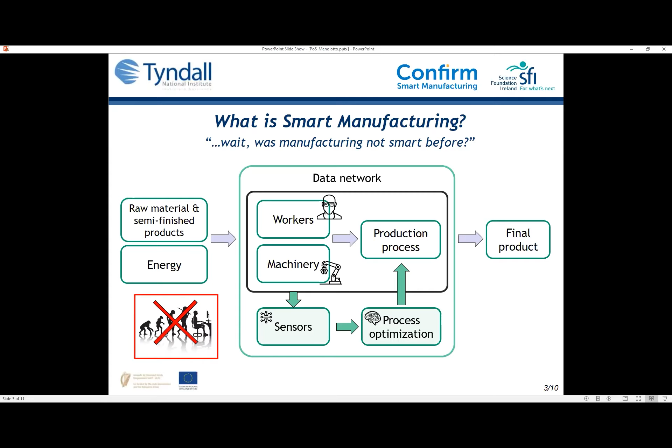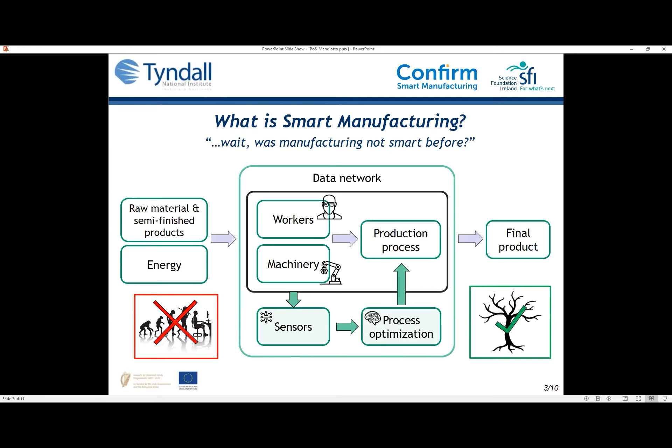And I think it's important to highlight that despite technological advancement generally being quite fast, this process has not started at a specific time. In fact, the industrial world is constantly and slowly incorporating any mature technology being developed, which is why I don't like the term Industry 4.0. It's catchy, and it conveys very effectively the meaning of technology going a step forward. But this advancement is not a linear process. It's rather the result of many different lines of research; some of them succeed, some of them just drop.

Similarly to human evolution, we have all seen this famous image in many versions where a monkey slowly starts to walk and at the end becomes a human. But in reality, what anthropologists know since a while now is that this vision is a very rough simplification and ultimately wrong. Evolution is more like a tree with many branches that coexist at the same time. Some of them fall down, others go on. And technology is very much similar to evolution, I would say. So after this little philosophical tangent, let's go back to the topic.

The real game changer, I would say, in this revolution are data. We can now easily measure a lot of physical phenomena, and with those data we can build models that we can use to predict a specific behavior or to control a specific effect according to our goals. Let's make a few examples.

If you want to keep the room temperature at a specific value, let's say in the summertime, maybe not here in Ireland, but in our classic summertime, we can measure the temperature with a thermometer, and we can easily implement a system that when the temperature goes above a certain value, switches on the fan. This is a very simple system where the information about the temperature is used almost directly to control the parameter that the sensor is measuring.

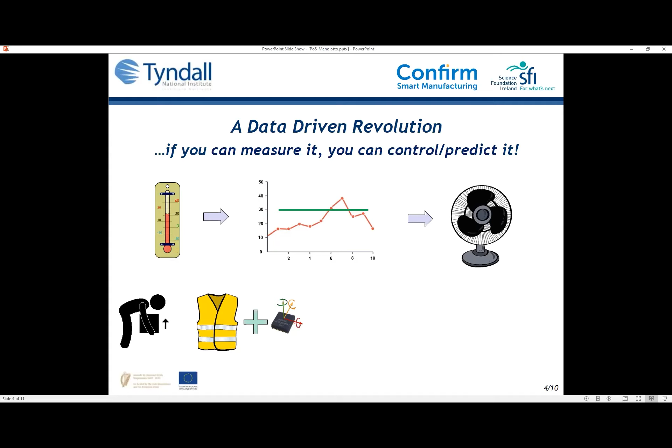Another example could be measuring the posture of someone lifting a box, for instance. Now, there are two ways to lift a box. I don't know if you know that, but I can answer this question. There is a wrong way and a right way.

Or, to explain better, there is a specific body configuration that minimizes the stress to the musculoskeletal system while lifting. So now we can place, for instance, an inertial sensor on a vest, and inertial sensors can detect the direction of the gravity force. So they are usually used to track the orientation of an object in 3D space. And now we can actually build this vest and make the worker wear this vest.

And there are models already that tell us that if your back tilts over a certain angle, your risk of having injuries increases. So we can measure how vertical the back is during the task, and we can, for instance, launch a warning to the worker if his or her position can cause some harm, preventing him or her from having injuries or muscular pain. And that's it.

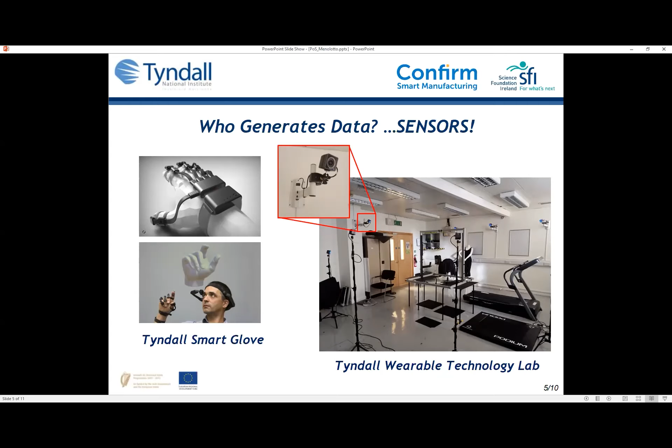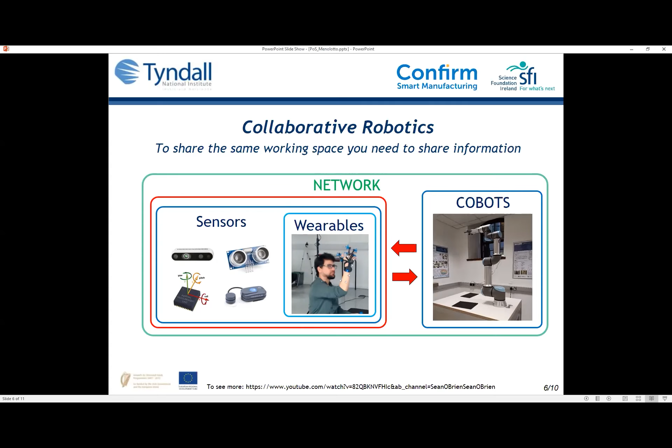So why this last example? Well, this last example finally allows us to jump into the field I'm working on at the moment. In particular, my group is very active in the development of wearable technology, which are devices that, as the word says, can be worn or are in general portable and able to measure some parameters of the person, pretty much like Melusine said about the contact lens for cows. The classic example is the smartwatch, where there are smartwatches that can measure how many steps you are taking, or now also the heart rate and other parameters.

Now, the one you see in this slide is the Tyndall Smart Glove, which is a project I joined and I'm currently working on. It is used to track the orientation of the hand in space via the same inertial sensors we were talking about before. And I also put a picture of one of our labs that we use to develop this technology. There's quite a lot going on in that lab, as you can see, but I wanted to highlight especially the little cameras there. That is actually a very accurate motion capture system that we use to evaluate how accurate our technology is.

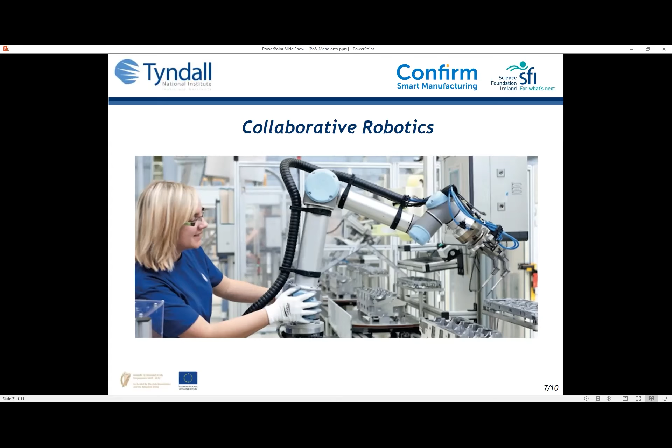So as you can see, the glove could be used for virtual reality applications, given we can recreate a virtual avatar of our hand with the orientation of each part, palm and fingers included, and we can track it in real time. The idea here, though, is to use the glove also as a human-robot interface for teleoperation applications. So to remotely control a robotic arm, for instance, or a gripper, or a robotic system in general for collaborative robotics applications.

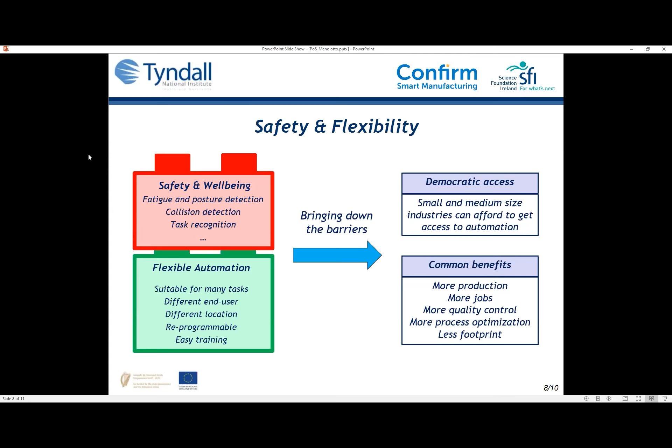Now, collaborative robotics is a very fascinating field that has been enabled by the use of this technology. In a collaborative robotic scenario, operator and robot work together, sharing the same working space. Now, this of course raises a hell of an issue in terms of safety, primarily, which is being addressed by implementing different strategies, the majority of which adopt sensors, once again, to detect the position of the worker and the position of the robot in real time in order to avoid collisions, just to name one.

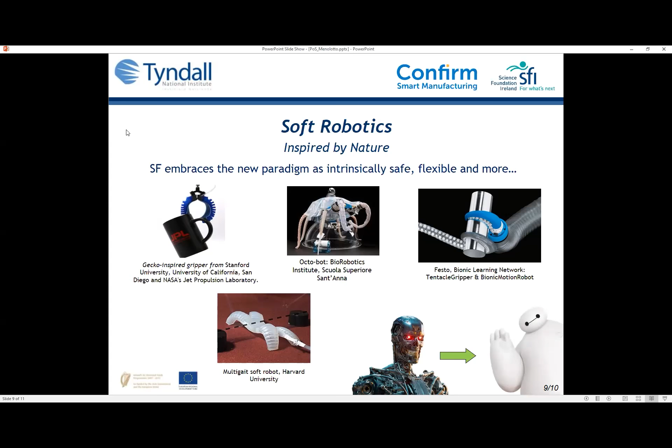But there are also a lot of research topics trying to tackle this problem from different angles, aiming at making robots, for instance, intrinsically safe. And we will see later what I mean by intrinsically. Why is collaborative robotics so attractive? Well, it's not just for its technological flavor. It's mostly because of its flexibility. So the capability to readapt to different tasks, being easily reprogrammable and relocated in any part of the industrial compound where it's most needed, without impacting the existing infrastructure.

And as you can imagine, this means that automation becomes much more accessible and affordable to medium and small scale industries as well, which can get all the benefits of automation, expanding their production and their employability as well. Still, one of the great challenges to fully enable this scenario is safety, which should be implemented at different levels, if not even in the design process itself. So in that sense, I said intrinsic.

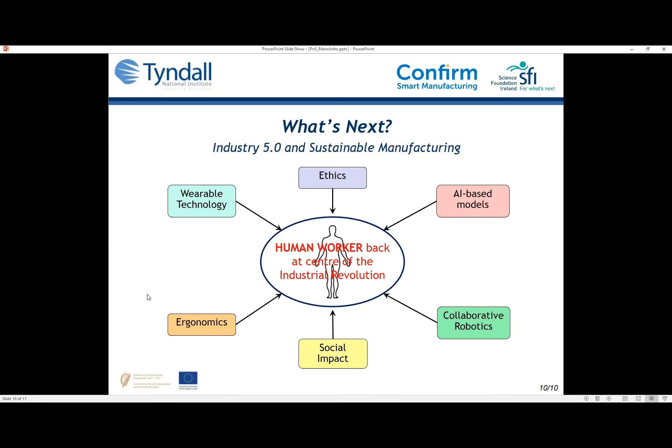And here is an example. To explain what I mean by intrinsic, I brought this specific example, which is the so-called soft robotics. It's a kind of robotics that is inspired by nature. Basically, they are trying to create a naturally compliant robot, which not only makes the whole human-robot interaction much easier and much safer, but also solves a lot of other open problems in robotics, especially object manipulation and navigation.